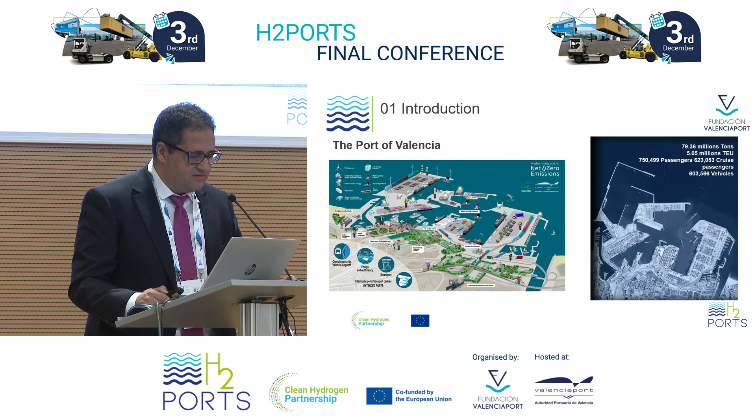In any case, my introduction is talking about the Port of Valencia. You know that we are looking for net zero emissions, and this project is very important to provide solutions for the port terminal operators in order to decarbonize their facilities. The Port of Valencia is the fourth most important port in Europe, and this is a crucial issue because it is really needed to be very close to innovation and to the decarbonization of the activities.

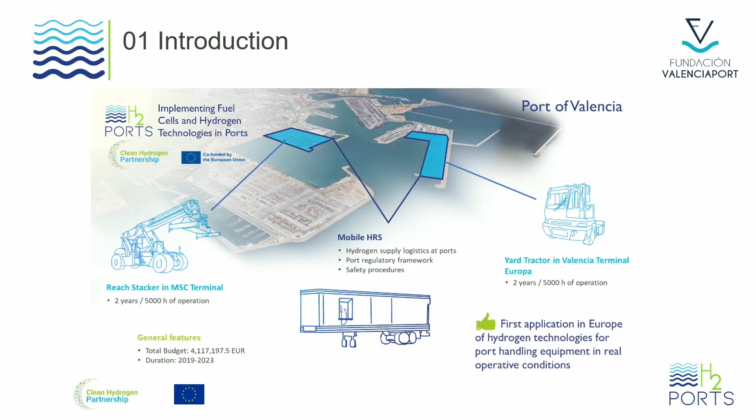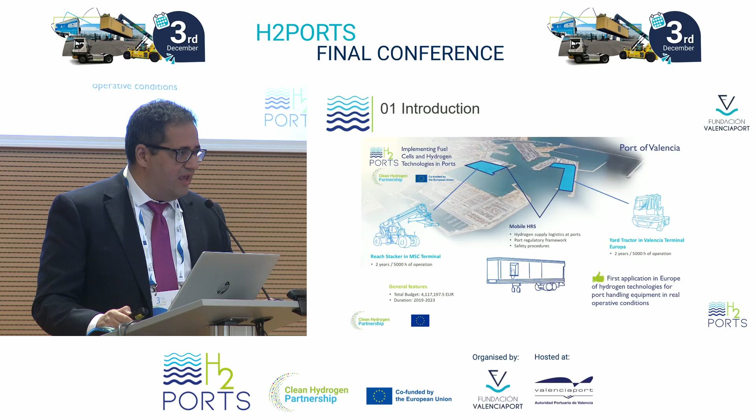You will see here the location of the port, the layout of the Port of Valencia, and I want to explain the location of the machines. The Reach Stacker was working in the Mediterranean Shipping Company Terminal Valencia. There is another machine, the yard tractor, in Valencia Terminal Europa by Grimaldi Group - it's a Ro-Ro terminal. And also we will see in Xità Quay the hydrogen station, which is a fixed and a mobile one, and you will know about that in a few minutes.

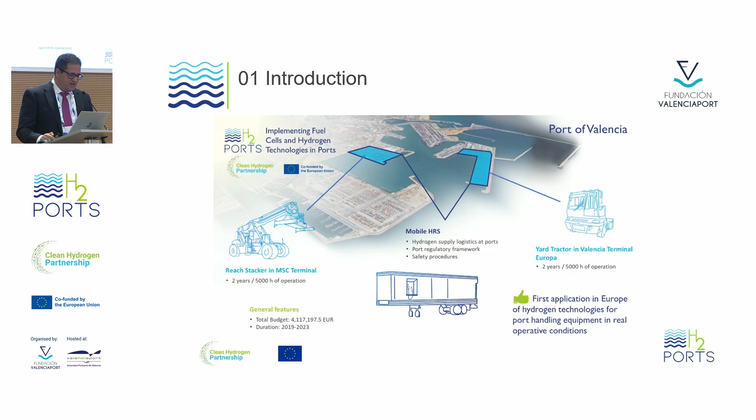The budget of the project was 4 million euros and the duration was 7 years. It's the first application in Europe of hydrogen technologies for port handling equipment in real operative conditions. We are not building a project, we are building pilots, and in this case it's very important. In some European projects, you see a lot of literature, demos, etc., but here you will see real machinery in the ports and operating in the terminals.

I want to say thank you because we are 10 partners. We started with 9 partners only, and now we have another one that was crucial also to understand the logistics for that. But of course, the Port Authority of Valencia is very important - the support from them. They started with this idea, trying to boost this solution for the port terminals. They are also escorting the port terminals that want to test these machines. It was very, very important.

Also, the challenge for Centro Nacional de Hidrógeno and ATENA - they are really very hard workers, trying to define some solutions in that sense. It was very difficult for them because they are research institutes and institutions, and now we see that they did a very good job. Also the end users, MSC Terminal Valencia and Grimaldi - without them, the end users, it's impossible to test anything, because we are talking about machines working in real conditions.

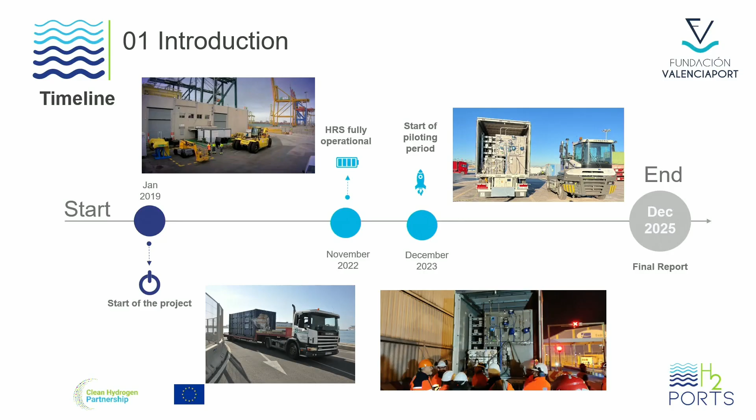I have to say it was very difficult because we are talking about 7 years. This is another thing I want to state: when we are thinking about real pilots, we need time, and sometimes the projects don't have enough duration to achieve that. I'm not going to talk about the pilots because there is a session for that, but we have a hydrogen supply, we have also a Reach Stacker, and also we have a 4x4 yard tractor.

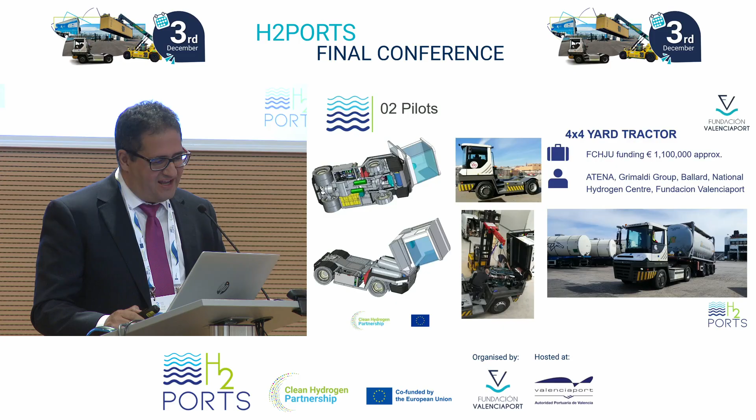Results: duration 7 years. We have to say that from 2019 to 2025, we had a coordinator before - Josep Sanz was the first. I had the honor to continue the work, and also my colleague Aurelio is the technical coordinator of the project. So for me, it's very important to understand that during 7 years, there were a lot of changes. It was a harsh reality.

We started with a budget of 4 million euros, more or less, and we are expecting to finish the project with 7 million of expenditure. So I want to say that the commitment from H2PORTS, in this case from ATENA, was crucial. Also the end users put money directly, apart from the budget, in order to address all the objectives of the project - this is very important. We have to say that we found it very difficult regarding adaptability and resilience because we had 4 amendments.

I say 4 amendments because it's very important to explain that we had COVID in the middle. There was a delay, and we started doing the meetings online. So it was very crucial, even though it was very difficult also to have a dinner together as a consortium. That is really important.

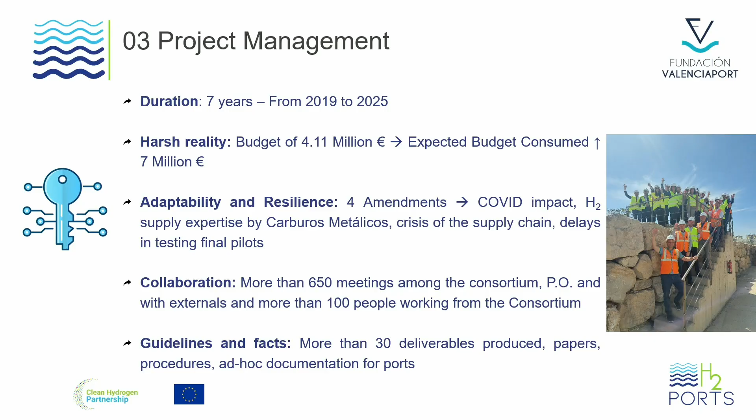Collaboration is crucial. We always say that, but we have a reflection of it in the more than 650 meetings among the consortium, project officer, externals, stevedores. They were here also, very committed to the project from the first moment, and also more than 100 people working in the consortium. So these are very good numbers.

And finally, guidelines and facts. We will have more than 30 deliverables produced. We have produced papers and procedures that are preparing the basis for the port, and finally ad hoc documentation for ports.

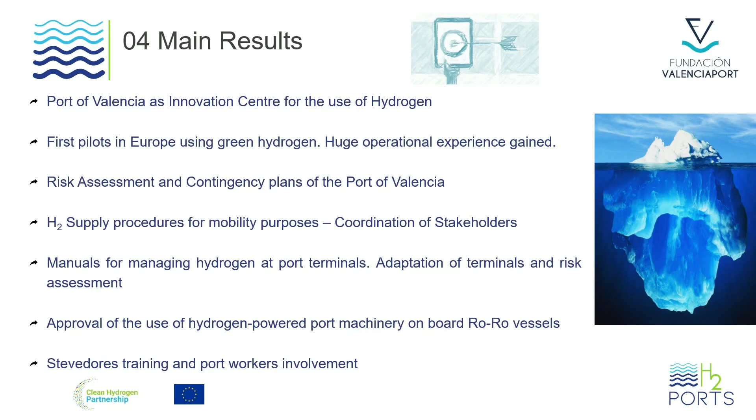Main results, again, you can see here an iceberg, because sometimes in the project we don't know what is behind the water. But here we have to say that we put the Port of Valencia as an Innovation Center for the use of hydrogen. We are talking about the first pilots in Europe using green hydrogen, a huge operational experience gained. Also, we are talking about risk assessment and contingency plans of the Port of Valencia.

We now, as I mentioned before, the coordination of stakeholders was crucial. We were managing some manuals for hydrogen at port terminals, and the adaptation of the terminals to adopt these pilots and to prepare them for the supply. And also we have the approval for the use of hydrogen powered port machinery on board ro-ro vessels.

I think Athena will explain that there was a specific study from RINA to allow a machine to go on board the vessel with hydrogen. So it's very important that. I think this is the first time in the world, I don't know. But also the stevedores training and port workers involvement.

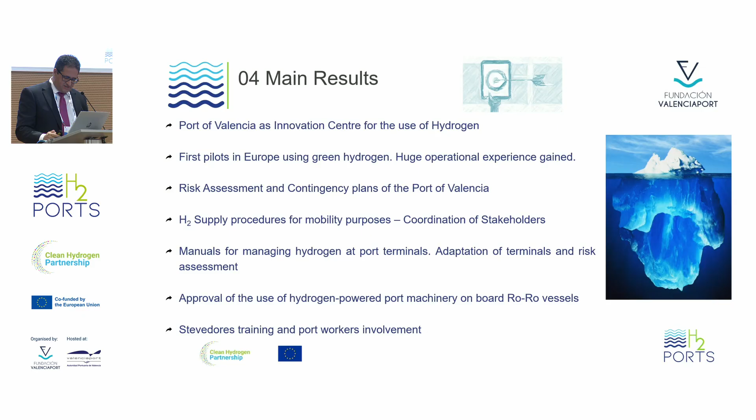Regarding the communication results, as Juan Manuel said before, we started with a stakeholder advisory group. We started with only 10 or 12 entities, and we gathered more than 80. In this case, you can see here the ports. The ports were thinking that this concept was very interesting, and they bet on this.

Also public authorities, port maritime entities, associations and industry. We had six meetings with a lot of experts. I couldn't put all the presentations here, but there were a lot, and you can also follow the website to access these presentations. And our idea, as a result, is to continue working in this stakeholder group, because it's like a mandate from the Port Authority in order to boost this discussion.

Regarding the communication results, I have to say that we have an average of 3,600 users on the website. Also 5 newsletters, more than 25 press releases, more than 60 conferences attended by all the staff in H2Ports. Over 500 followers on LinkedIn and more than 500 news items generated during these 7 years.

So, concluding and going to the point, we have to say that hydrogen technology successfully integrated into port operation is a reality here in the Port of Valencia. We are talking about hydrogen. In the first moment, we thought that hydrogen is very dangerous. No, hydrogen is not dangerous, it's very, very safe, and we see that there is an efficient performance under real conditions in this case, following some procedures, coordination and training that is needed.

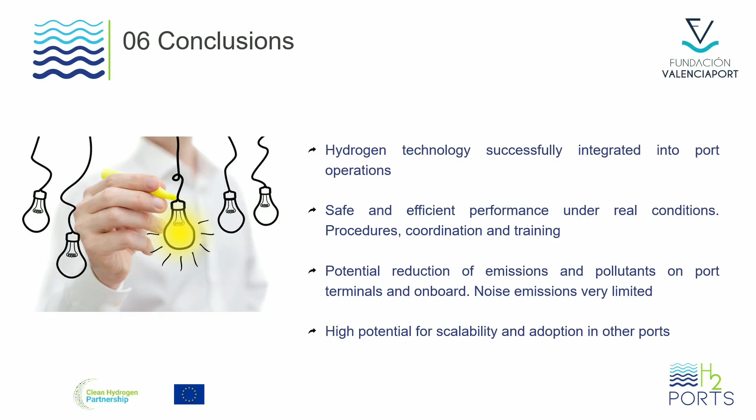Also, we see that hydrogen has potential for reducing emissions and pollutants on port terminals and on board. Maybe Athena will explain later, but when you put the yard tractor, 4x4, within the vessel, the emissions are zero directly. This is a very important objective and goal that we have addressed and achieved. And finally, we see that there is a high potential for scalability and adoption in other ports.

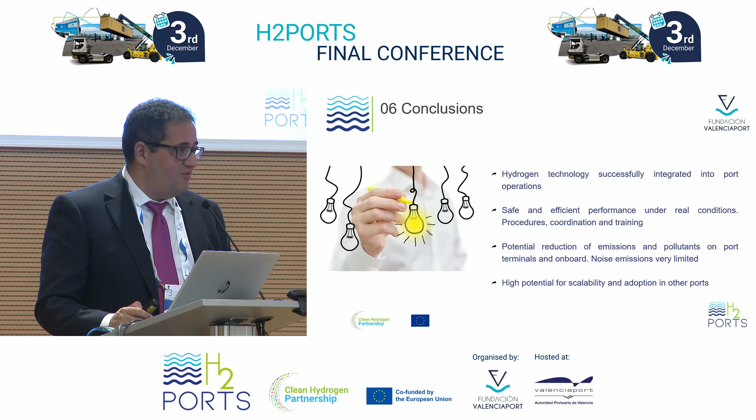You can imagine I'm not nervous because we are here in a family. We are the hydrogen family in this case. I have to say that it's very difficult to summarize all the things that we have done in 7 years, and you will see during the session.

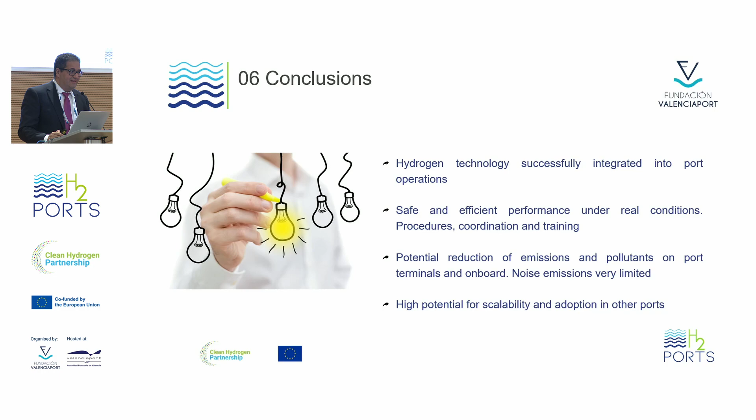But my idea is, in order to facilitate that, I'm going to show you a video. So this is the final video of the project, to explain all these things that maybe you cannot see otherwise, and you will see them when the video starts. So please.

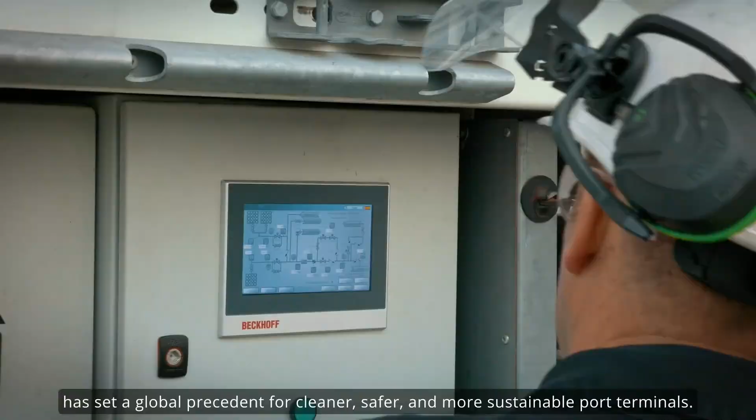H2PORTS is a pioneering initiative developed at the Port of Valencia, whose main objective was to evaluate and demonstrate the use of hydrogen in port operations. This project, coordinated by Fundación Valenciaport and financed by Clean Hydrogen Partnership, has set a global precedent for cleaner, safer, and more sustainable port terminals.

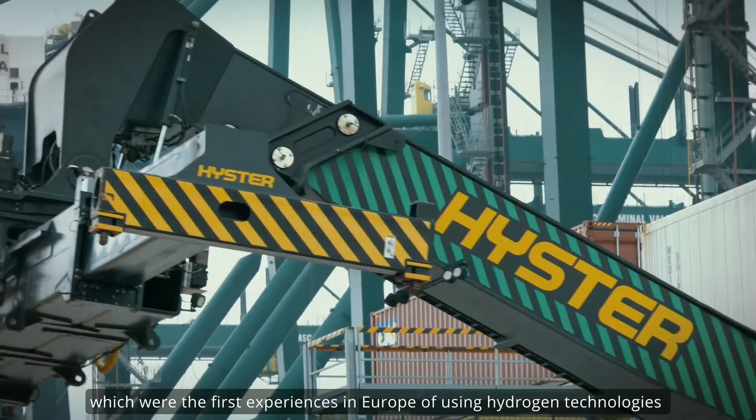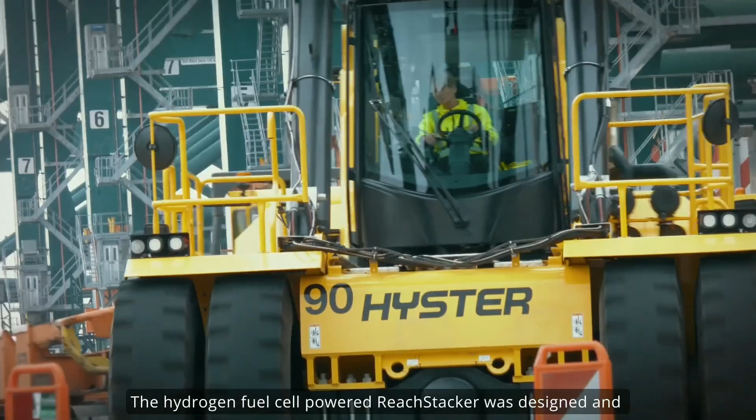During the project execution, two pilots were tested, a reach stacker and a yard tractor, which were the first experiences in Europe of using hydrogen technologies in port handling equipment under real operating conditions. The hydrogen fuel cell-powered reach stacker was designed and built by Hyster and tested at the MSC Terminal Valencia.

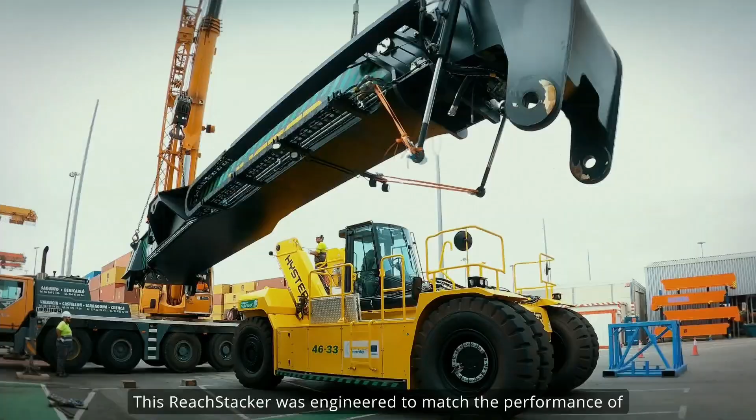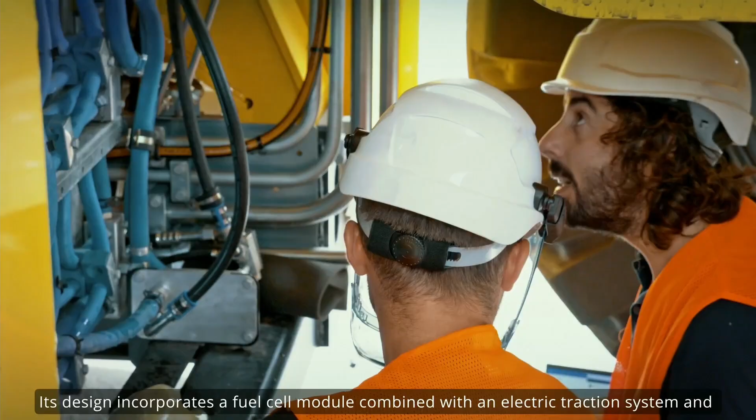This ReachStacker was engineered to match the performance of its diesel equivalent, both in lifting capacity and operational speed. Its design incorporates a fuel cell module combined with an electric traction system and independent hydraulic motors. This allows for efficient energy distribution, especially during peak operations.

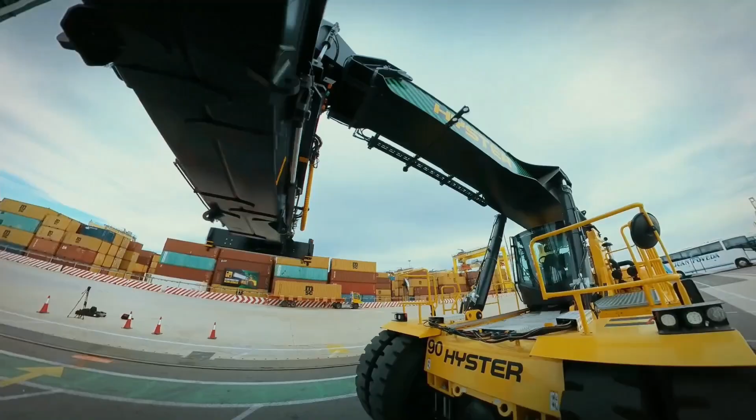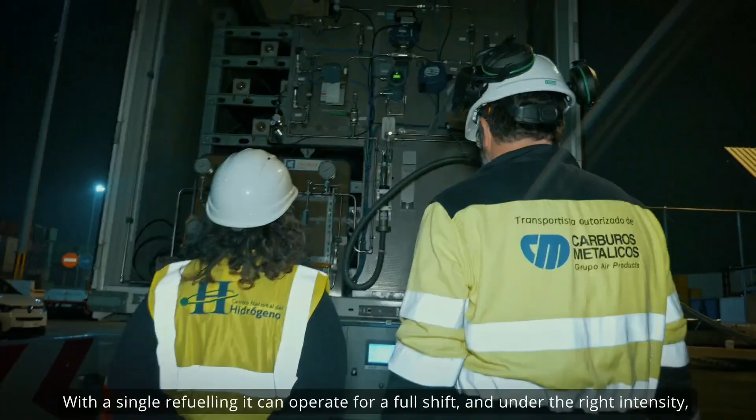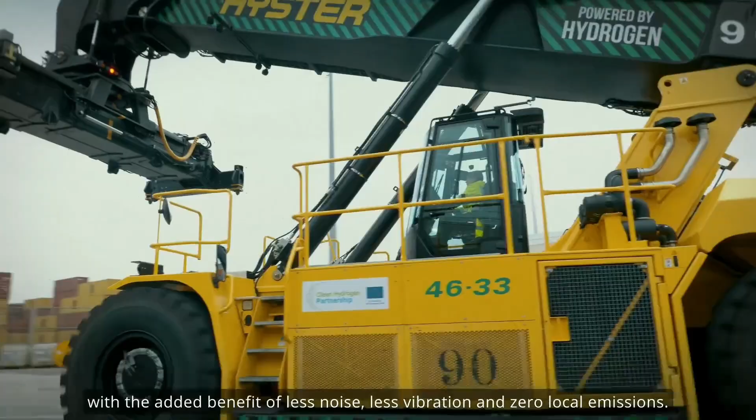The machine integrates 4 high-pressure hydrogen tanks, following SAE standards for easy global compatibility. With a single refueling, it can operate for a full shift, and under the right intensity, even complete 2 shifts without interruption. Moreover, dock workers gave positive feedback on the reach stacker, noting similar performance and comfort to diesel models, with the added benefit of less noise, less vibration, and 0 local emissions.

This pilot has demonstrated that hydrogen technology can be seamlessly integrated into high-demand port operations, replacing fossil fuels without compromising efficiency, safety, or operator comfort.

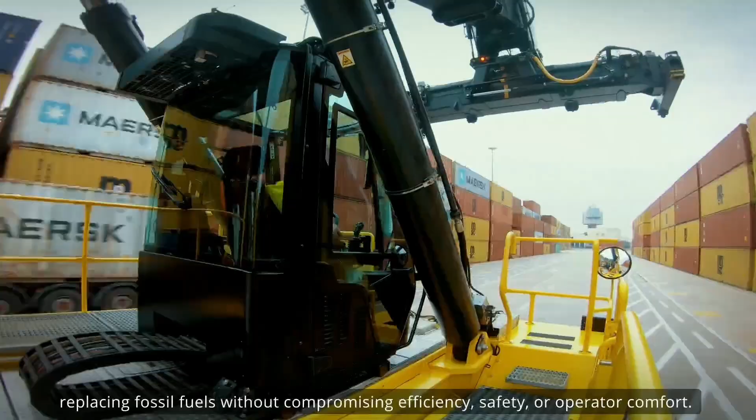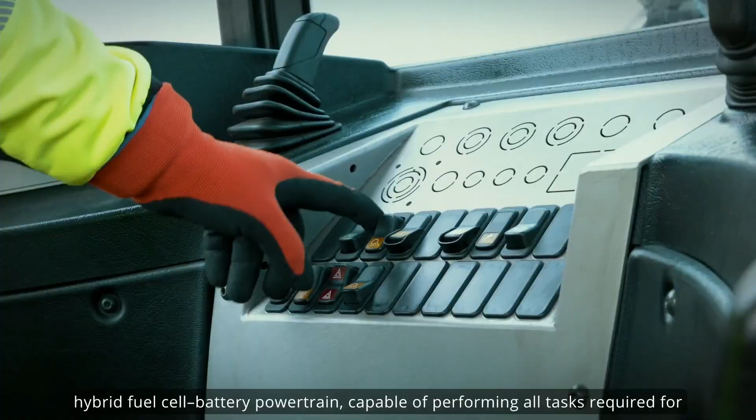The Hydrogen Yard Tractor is a prototype port vehicle with a hybrid fuel cell battery powertrain, capable of performing all tasks required for cargo loading and unloading.

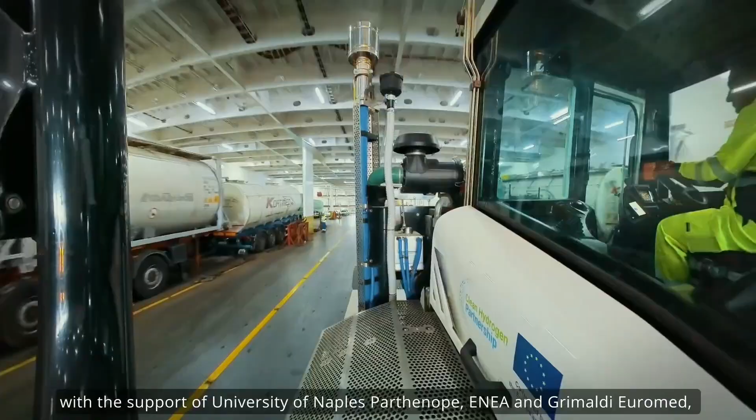The conversion of the vehicle from a diesel unit was carried out by Athena, with the support of University of Naples Parthenope, ENEA, and Grimaldi Euromed, and tested at Valencia Terminal Europa, part of the Grimaldi Group.

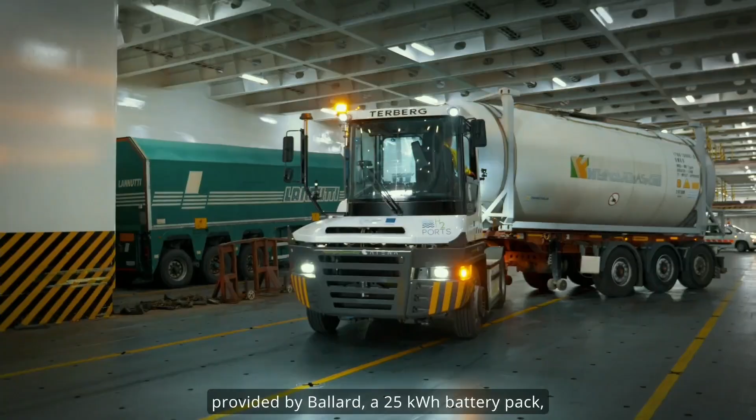The vehicle is equipped with a 70-kilowatt fuel cell module provided by Ballard, a 25-kilowatt-hour battery pack, and 4 350-bar Type 3 cylinders, providing about 6 hours of continuous operation, matching a full work shift.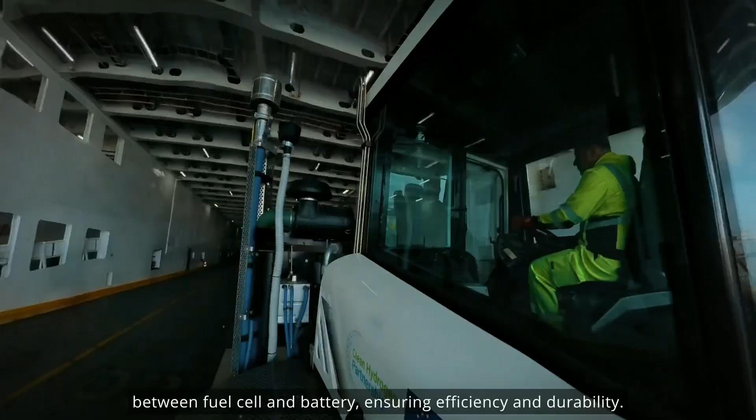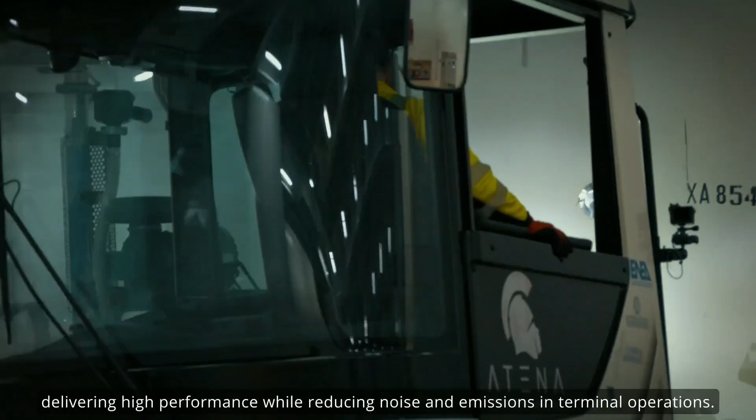The project faced major challenges, notably the development of an advanced energy management strategy to balance power flows between fuel cell and battery, ensuring efficiency and durability. The pilot proved that existing port vehicles can be effectively converted to hydrogen, delivering high performance while reducing noise and emissions in terminal operations.

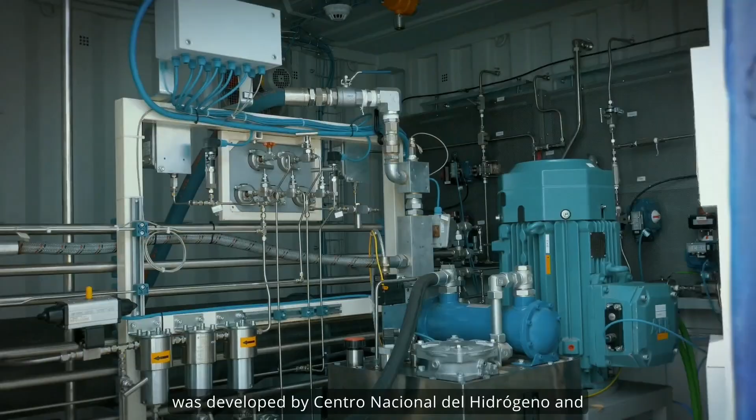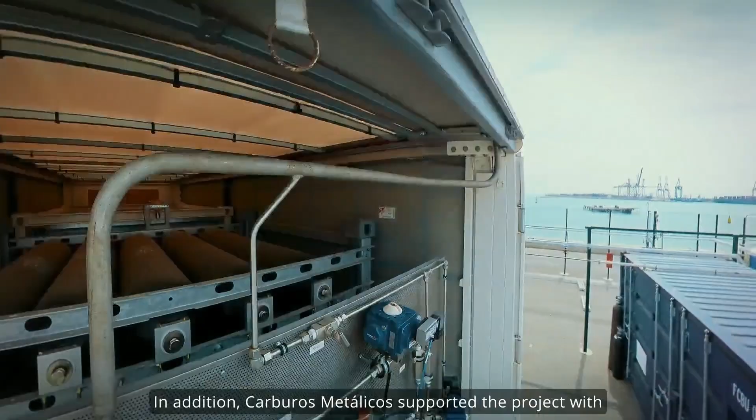The location of both pilots in different terminals of the port required a flexible solution, the Mobile Hydrogen Refueling Station. This innovative, tailor-made solution for delivering hydrogen to both pilots was developed by Centro Nacional del Hidrógeno, and it has been operated by Carburos Metálicos, Air Products Group, as the project's renewable hydrogen supplier partner. In addition, Carburos Metálicos supported the project with refueling logistics, training, and safety coordination across partners.

The hydrogen refueling station consists of 2 subsystems, a fixed unit housing the compressor and storage system, and a mobile unit, equipped with high-pressure cascade tanks and a dispenser.

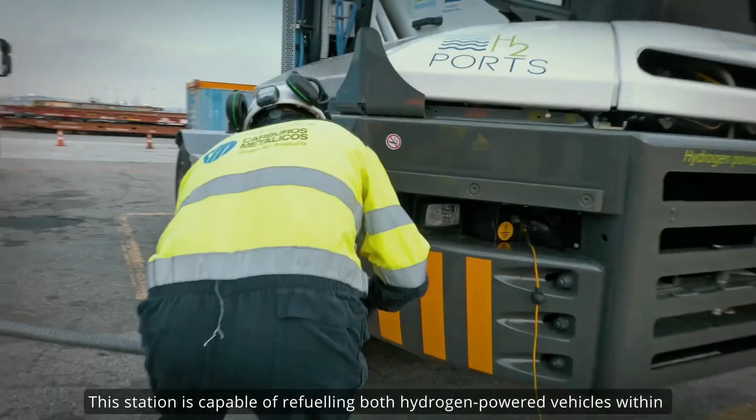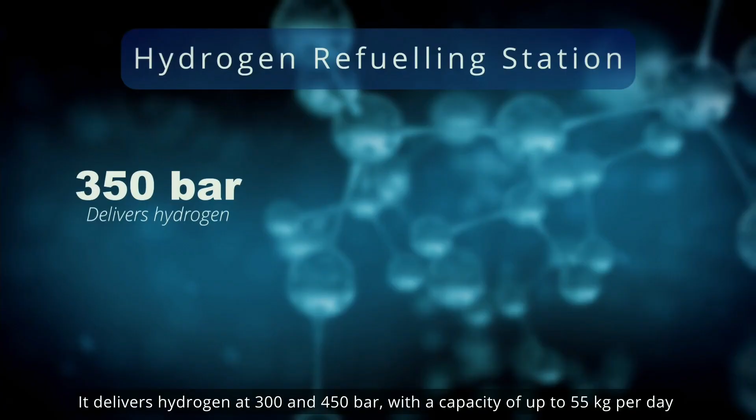This station is capable of refueling both hydrogen-powered vehicles within a single shift, providing flexibility, operational autonomy, and high safety standards. It delivers hydrogen at 350 and 450 bar with a capacity of up to 55 kilograms per day and a maximum dispensing rate of 3.6 kilograms per minute.

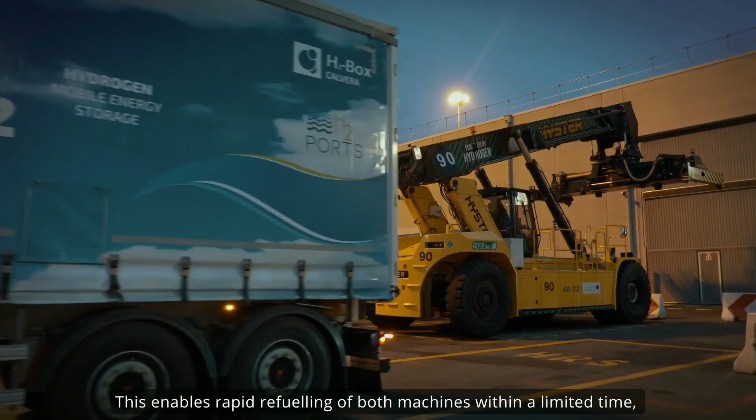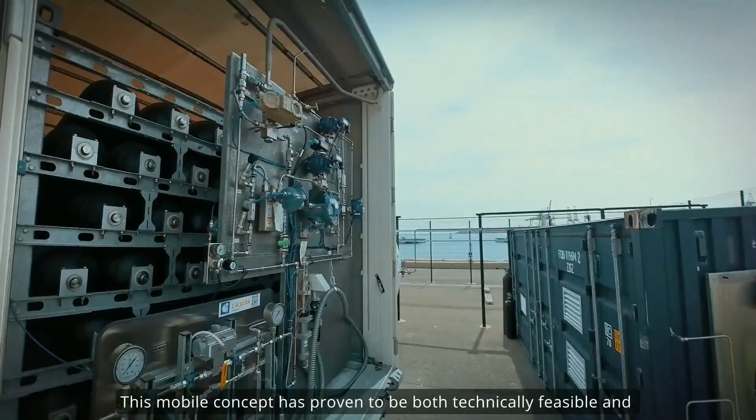This enables rapid refueling of both machines within a limited time, one of the key operational advantages of hydrogen technology in port environments. This mobile concept has proven to be both technically feasible and operationally effective, offering a scalable model for hydrogen deployment in other complex and regulated environments such as ports.

H2PORTS has brought together key partners in the fields of logistics, energy, and innovation: Fundación Valencia Port, the Port Authority of Valencia, MSC Terminal Valencia, Grimaldi, Carburos Metálicos, Air Products Group, Ballard, Atena, Hyster, Centro Nacional del Hidrógeno, and Enagás.

H2PORTS has also managed to lead a group of 80 relevant stakeholders who have regularly attended workshops to discuss hydrogen use in maritime transport. With an investment of 4 million euros, this project has demonstrated the viability of hydrogen at European ports.

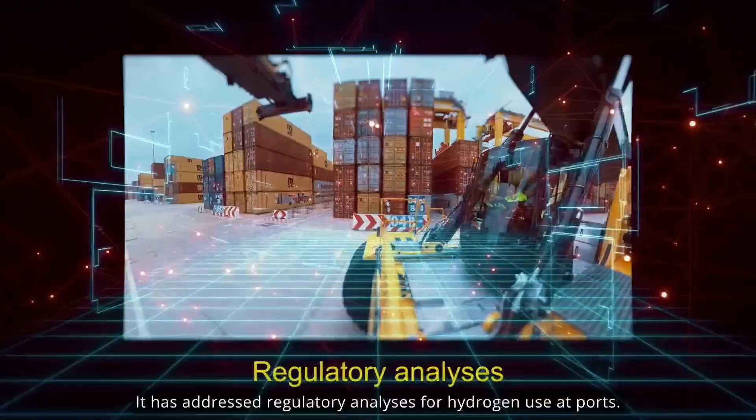Beyond the technology, H2PORTS has tackled key issues. It has addressed regulatory analyses for hydrogen use at ports. It has created pioneer operational guidelines for mobile refueling stations. It has highlighted the relevance of specific training and safety protocols and the need of a collaborative approach. And it has laid the groundwork for hydrogen integration in port master plans.

The operational phase of H2PORTS has provided valuable real-world data, offering a unique operational experience that has proven essential for understanding the practical challenges and opportunities of hydrogen technologies in port environments.

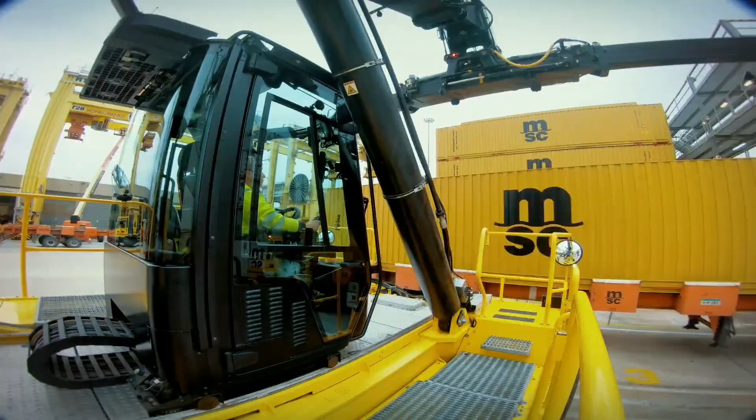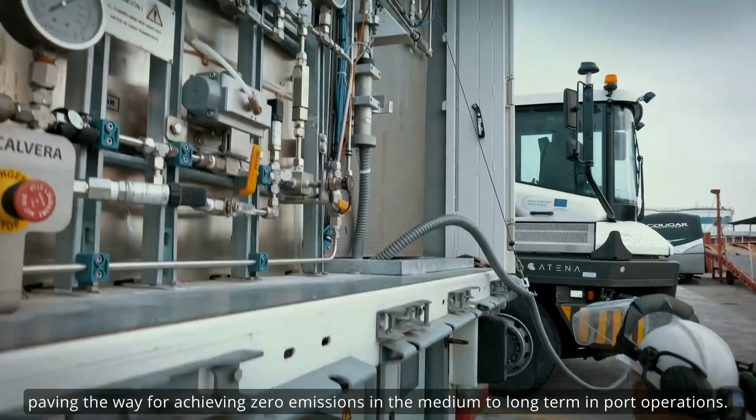While the full impact is still being assessed, the project has proven that hydrogen-powered machinery can become a safe, viable, and sustainable alternative in port logistics, paving the way for achieving zero emissions in the medium to long term in port operations. H2PORTS has ended, but its outcomes will guide the next generation of green port projects.